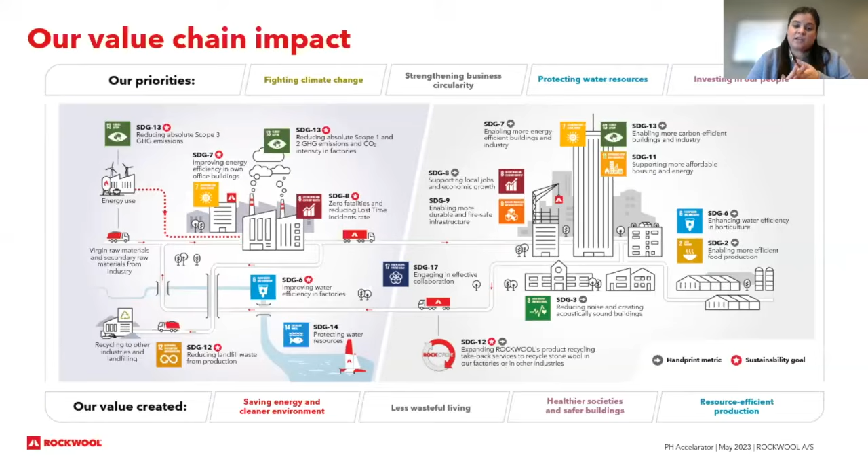I definitely wanted to highlight one of the sustainable development goals, which is SDG 17, partnerships for the goals. I think this is one of the really important ones — whether your company has official or unofficial alignment with these SDGs, it really focuses on the fact that we are all in this together. We all have a responsibility to work together to drive decarbonization down, to increase sustainability, et cetera. So this is one of our priorities as an organization, and one of the focus areas that Mahnaz and Robert play into is really trying to tie into the different organizations that align with our purpose and work together with the industry to drive the sustainability agenda as a whole.

But the title of this presentation was essentially ROCKWOOL Passive House, and how does that tie into the UN Sustainable Development Goals? So what I did was take a snapshot of what we highlight in our sustainability report, and what Passive House as the institution highlights in terms of the Sustainable Development Goals they've aligned with. What you can see here is that between both ROCKWOOL and Passive House, there are definitely some shared common goals that we are both actively working towards.

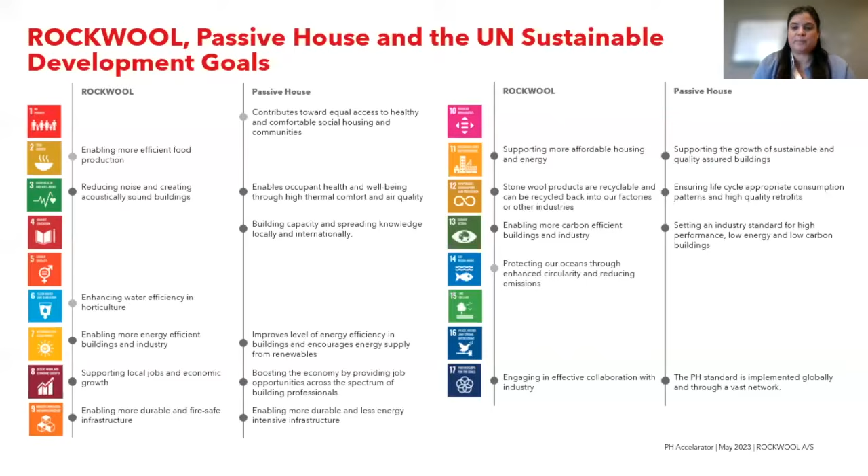So we did want to highlight some of the progress that we've had toward our sustainability goals. Again, you can find all of this information in our sustainability report that we put out every year. Back in 2015, when we initially committed to having sustainability at the forefront of our business strategy, these are the six goals that we developed and that are verified year over year.

First and foremost, reducing our CO2 emission intensity. Our goal was to reduce it by 20% by 2030. It's 2022, and we are 17% of the way there, so definitely in line with that goal. In the next slide, I'll talk about why we're so advanced in that goal, which has to do with additional commitments we've made.

We also have a goal, on the lower left, to reduce our water use intensity. Again, that goal was to reduce it by 20% by 2030, and by 2022 we were about 14% of the way there.

In the middle, you'll see increasing the areas or countries that have reclaimed material programs. Essentially, this leverages the recyclability and circularity that ROCKWOOL and stone wool insulation have by nature, being a product that is fully recyclable at end of life. End of life could mean scraps from construction sites, but it really ties into the conversation on retrofit—when buildings are retrofitted and have stone wool insulation, it can be taken out and recycled back into the process to develop new insulation. That's one of our goals.

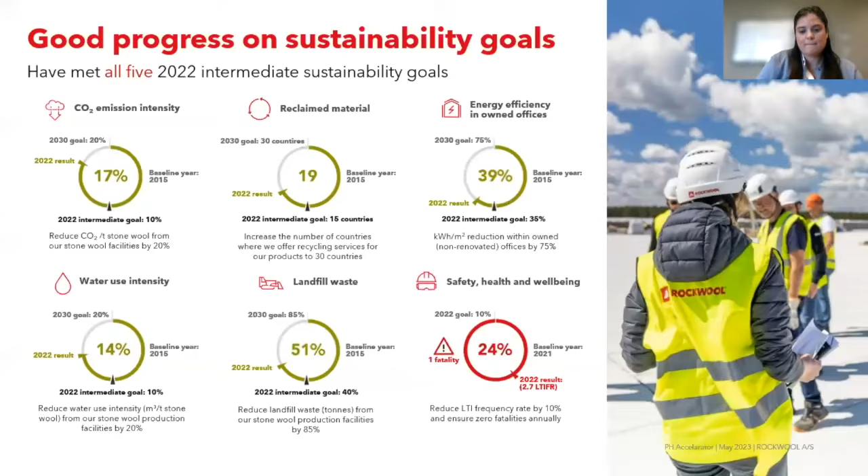On our next slide, I'll show you that most recently in 2019, we committed to even more stringent goals in accordance with the Science-Based Target Initiative. We committed to absolute greenhouse gas emission reductions of scope 1 and 2 of 38% by 2034, and we also committed to absolute scope 3 emissions reductions of 20% by 2034.

If you're not familiar with the differences between scope 1, 2, and 3: scope 1 is essentially the emissions associated with our manufacturing. Scope 2 would be the emissions associated with the energy production we use for manufacturing purposes. And scope 3 is basically everything else, upstream and downstream, that enables us to function as a company and as a manufacturer.

Because these are absolute emissions, and recalling from the previous slide that we're ahead of our original goal, having these additional absolute goals for overall greenhouse gas emission reductions has really deepened our focus on how we're going to decarbonize our facilities. Globally as a company, over the last few years we've made a lot of improvements to existing facilities, as well as having specific goals and frameworks for how efficient any new facilities will be. This is all part of the goal to reach that 38% reduction by 2034.

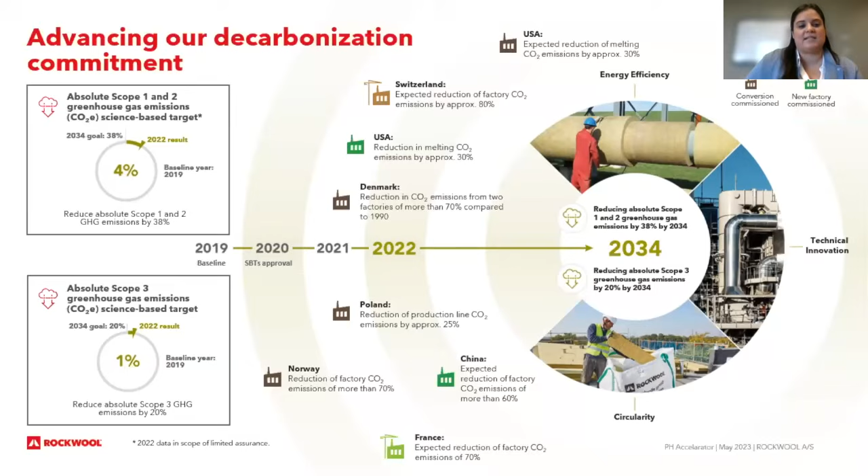The beauty of SBTI goals, and companies committed to them, is that in order to be approved to say you have these goals, you have to showcase how you're going to get there. It has to be fact-based, backed by science—demonstrating your strategy and framework, with science backing that yes, by doing that you can potentially achieve these reduction goals. You can't just go out and say as a company, 'I'm going to reduce it by 100%' if there's no real way of getting there. So it's another step toward having things third-party verified and validated for the market.

The big picture—why any of this matters—is because globally we have to reduce carbon emissions. We're focused on buildings, and as we've all seen, up to 40% of carbon emissions globally come from buildings. So that's ultimately what all of our goals are about, and we're all in this together.

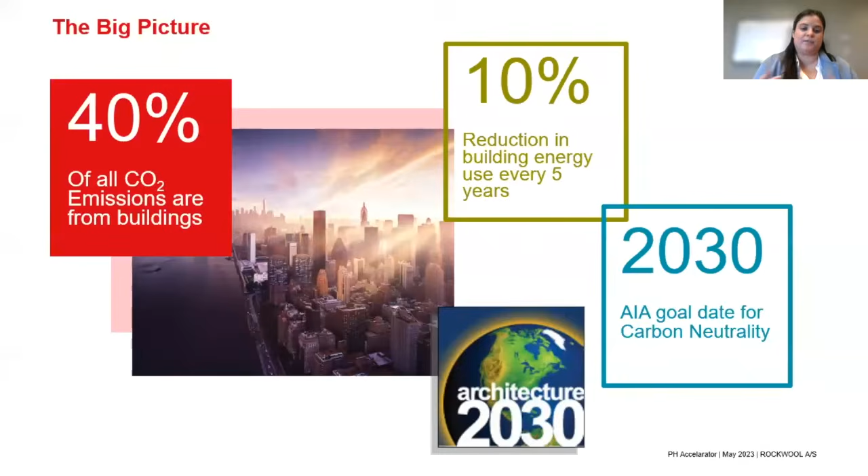Which comes to the second part of our conversation: focusing on retrofit, because we know buildings have such a huge impact on carbon emissions. It's important to focus on new construction and get those to net zero or near net zero, or passive house standard. But retrofitting buildings is going to be key to achieving these goals. I've highlighted some UN goals that I think directly contribute to and are directly applicable to retrofitting buildings.

Climate action, reducing environmental impacts, improving responsible consumption and production—retrofitting to passive house standard will enable these buildings to be more efficient, creating more sustainable cities and communities, and improving the health and well-being of building occupants.

Those of us who work on passive house projects know the additional benefits: comfort benefits from the thermal aspect, acoustical benefits, air quality benefits, etc. And then of course, highlighting partnerships for the goal—we're all in this together: manufacturers, organizations like Passive House, architects, designers, engineers. So with that, we can get into the retrofit side and the solutions we have to offer.

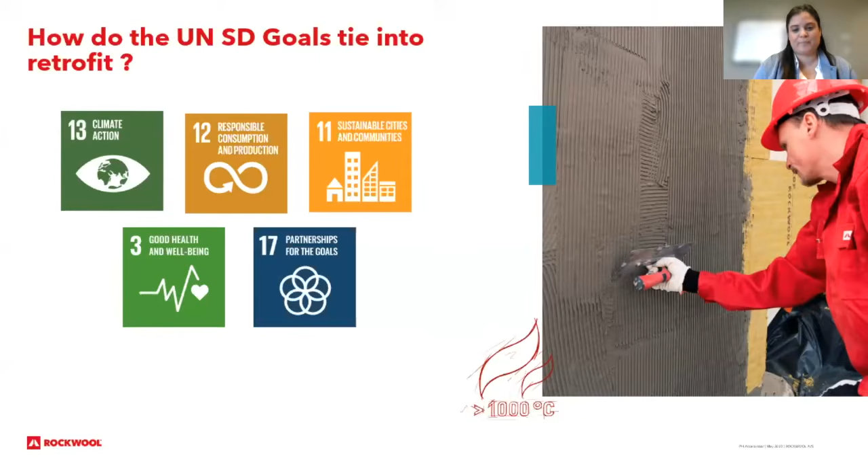One of the solutions we're going to highlight is the EIFS retrofit solution, which is certainly one of the lower cost solutions for getting into retrofits. Many people may not know this, but you can actually use stone wool as a non-combustible exterior insulation alternative to rigid foams. So when we're looking at a stone wool or EIFS solution, we again have to look at our assembly layers, because we're taking an existing structure and need to ensure we get an airtight and continuous insulation envelope.

First, we have to focus on having a primary air control layer, which can be different sorts of membranes, whether applied in liquid format or already existing. Then we need to add our thermal control layer. And finally, in the EIFS system, we finish with a finish render and reinforcing mesh to provide a proper surface cladding.

Definitely what's important here in this solution is that you have proper drainage efficiency. So the stone wool solutions and the types of materials that we can fabricate allow us to create different types of geometrically defined drainage channels behind the insulation boards. There are different manufacturers that have different patterns.

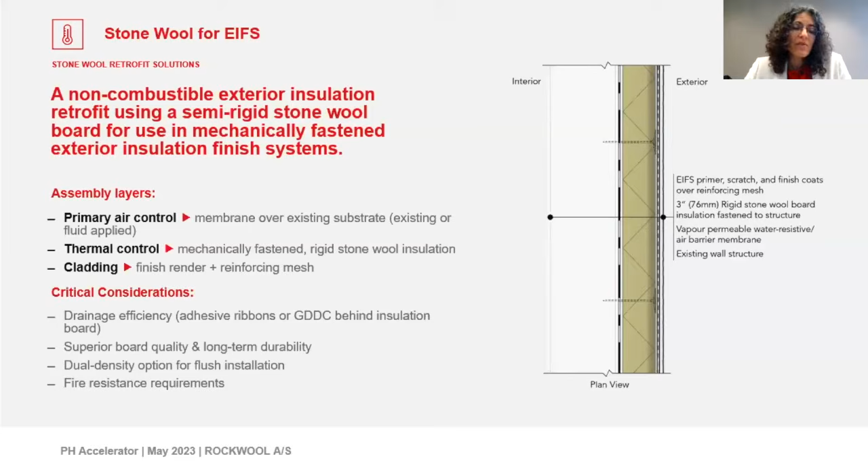We need to provide a really good board that allows for this handling, and is also a durable product. Using a dual density product would be helpful to adjust uneven surfaces in order to create a flush installation, and then by applying a fire resistant solution, you can get around issues such as buildings where you don't have any sprinkler systems installed. An example of that, and I had to add this photo here, is the Ken Soble Tower. I managed to get this because the Passive House Conference Canada took place in Hamilton, Ontario, from Monday to Wednesday, where we were present, and I was able to go there and take a photo of this great project.

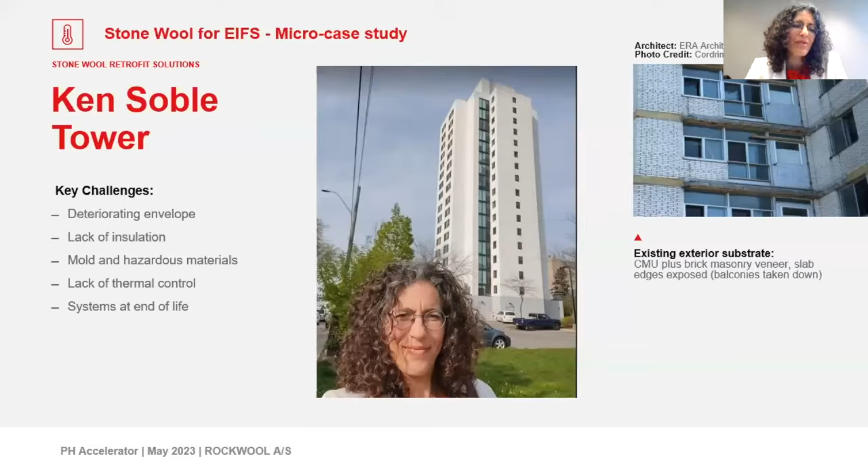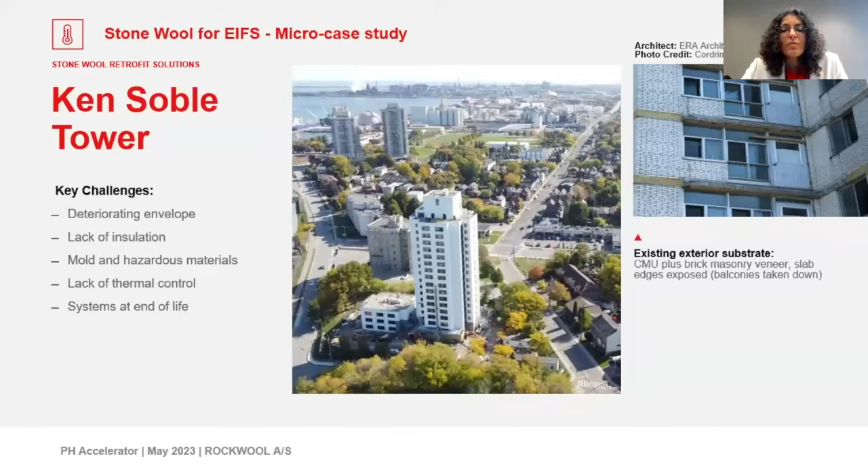So this is the Ken Soble Tower. It's really an interesting project. The architect was ERA Architects, and the key challenge here was a deteriorating facade. There was some mold, really a lack of thermal control, and most of the mechanical systems were at their end of life. So in order to provide a better envelope, a retrofit solution was chosen to get a really nice, low energy envelope in order to reduce the greenhouse gas emissions, and then EnerPhit certification was also an objective in this project.

And to date, it is the biggest EnerPhit certified project worldwide.

Another important factor was, of course, the reduction of thermal bridging, and passive climate resilience also was important, because we were looking at the specific group of occupants in this low income housing building. It's low income, or senior housing, and so the passive survivability became really important.

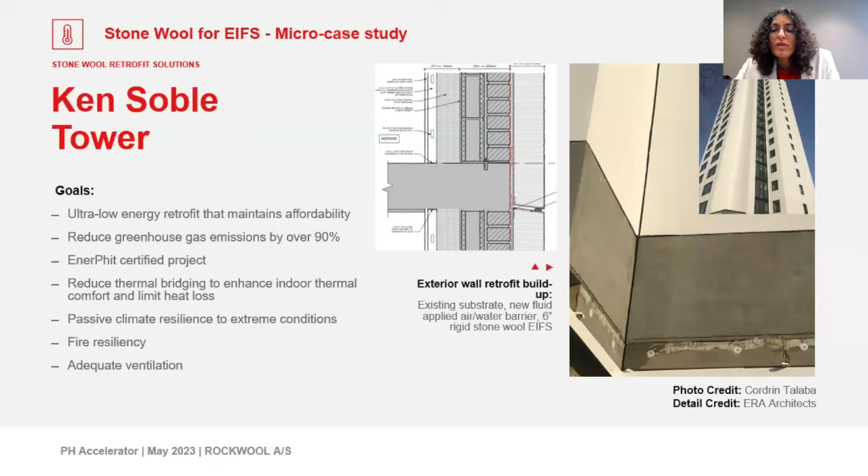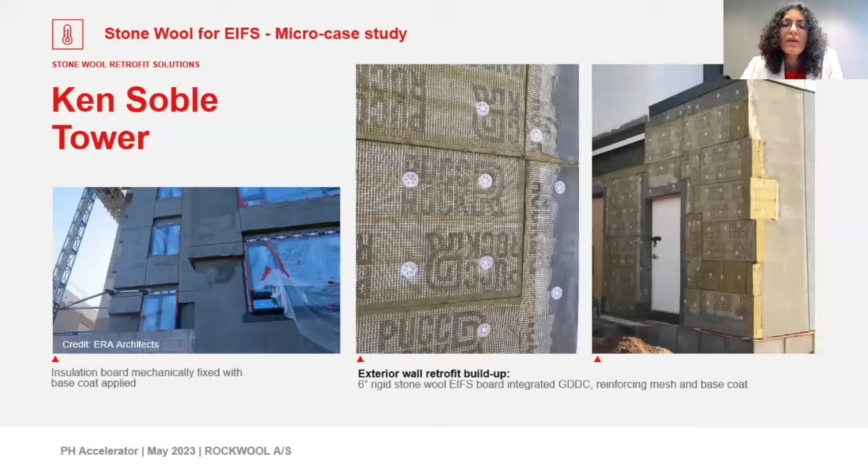So here are some images of the insulation board mechanically fixed, and then a base coat is applied. Here they were using 6 inches of semi-rigid stone wool. On the back side, this is the puck system, with rounded pucks on the back and drainage channels behind.

What was really interesting with regards to the survivability or passive resiliency of the project was some analysis that was done to evaluate the performance of the old and the new envelope over time.

So what we can see here is the interior temperature of the building at regular temperatures, and on the bottom part, we see the exterior temperatures. I think it actually happened that there was a power outage, and you could see that in a relatively short time, within hours, the interior temperature drops so rapidly at temperatures of -20, because the envelope is so badly performing. So people were basically forced to leave the building rather quickly.

An analysis was done to evaluate what would happen with this new envelope that is properly insulated and airtight. We can see here that it will take almost 2 days before people experience a temperature of 15 degrees, which is considered the survivability threshold for winter conditions.

A similar analysis was also done for overheating, and with regards to overheating, the new envelope will actually maintain the temperature at a supportable level for up to 4 days. So let me just get my mouse back here. There we are.

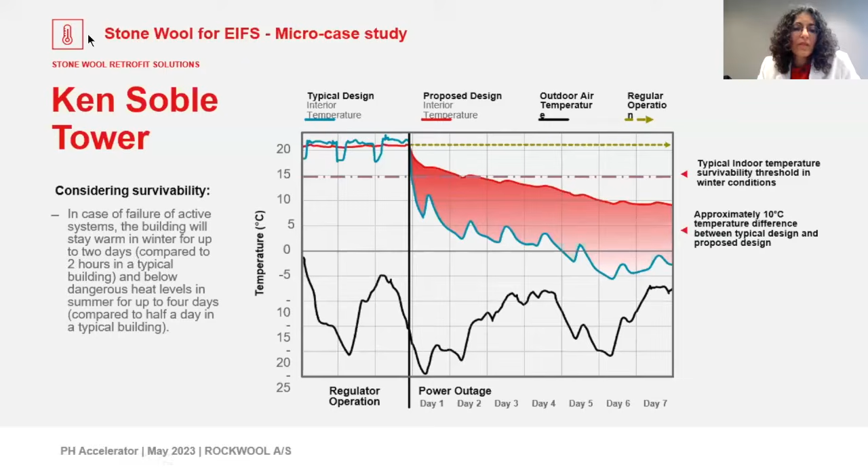Insulation boards are engineered to help reduce the amount of base coat that you need in this stone wool EIFS solution, and it will help create a more rigid surface so that it is more resistant to impact. At the same time, having a certain softness in the product allows you to adapt to irregularities of the wall. So this is a non-combustible insulation solution that you can use as an alternative to the standard EIFS systems that we know.

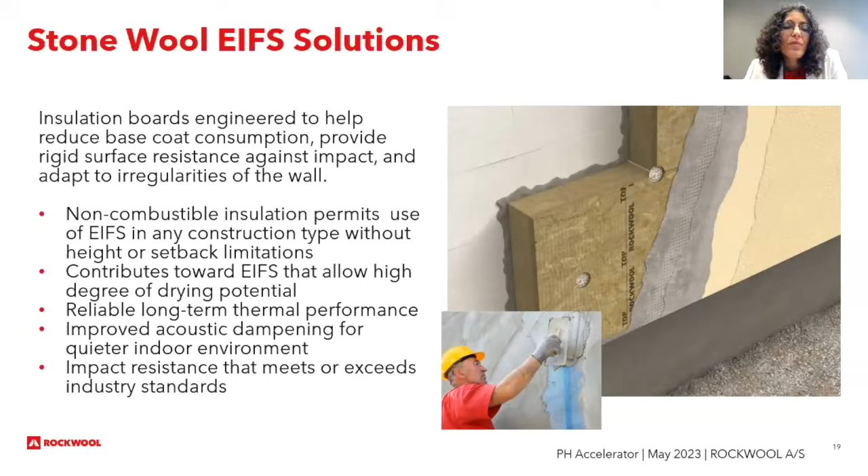So I'm going to talk about a different type of retrofit, overcladding, rather than using our EIFS solution, overcladding with a clip and rail and semi-rigid board solution. So you go ahead and slide. As Mahnaz mentioned, control functions are really key here.

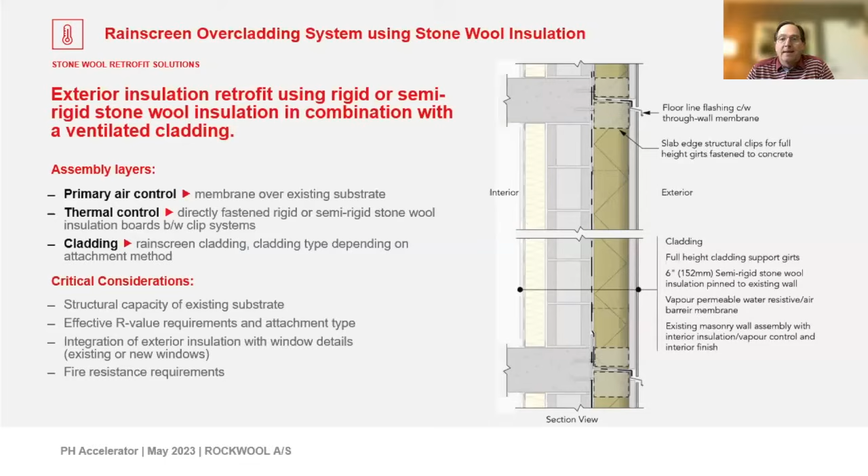But you also might see the use of a clip and rail system to minimize thermal bridging, and then of course supported, that's your cladding. Some key things to think about here: structure is important. The substrate that we're attaching to certainly needs to have some analysis and be able to support the weight of a new cladding. In the case of the project we're going to look at, brick was there before, so that shouldn't be a problem. But given the age of the retrofit you're looking at, these are variables we want to take a pretty close look at.

The other factors that they're dealing with on the project are the need to comply with Local Law 11. I'm sure there's a good number of folks on the call in New York City - this is where I really cut my teeth on building envelope. It's a facade inspection and safety program that's performed every 5 years, with a requirement to follow up on the findings of the engineer. In the case of this building and many like it in New York, that means that your building probably has sidewalk bridging around it for years on end. So that gets expensive, and so does the cycle of continuing to maintain these facades.

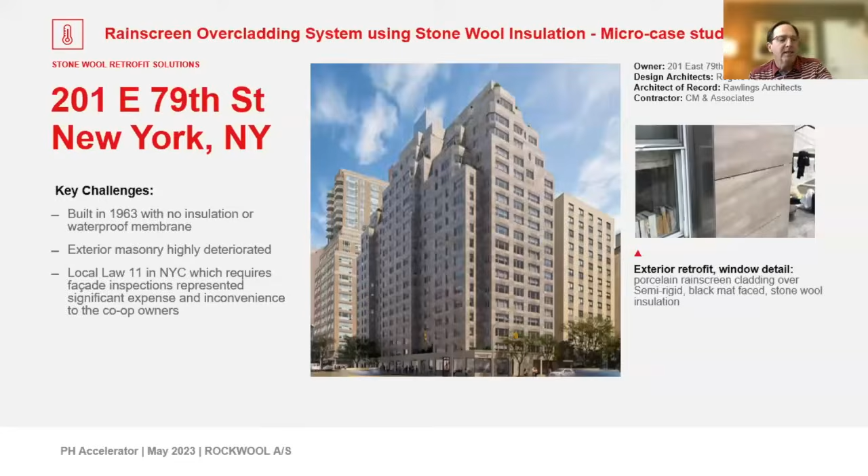So first step, of course, was doing some investigative work, looking at what that substrate looked like. Ultimately, the decision was made to remove all the brick and put in a new cladding system.

Some of the other goals they were looking at were to meet Plan NYC 2030, so carbon reduction goals of up to 30%. In the meantime, we also have seen the implementation of Local Law 97 in New York, so they happen to get ahead of that as well. They're looking to avoid the compliance fines around Local Law 97, as well as Local Law 11. Of course, we want to improve indoor comfort with the effort.

This is a co-op building in New York, a lot of structures like this in this part of the city, with some of the original occupants still there from 1963. Of course they want to increase their property value, and the big goal here, of course, is to come up with a better energy efficiency picture overall.

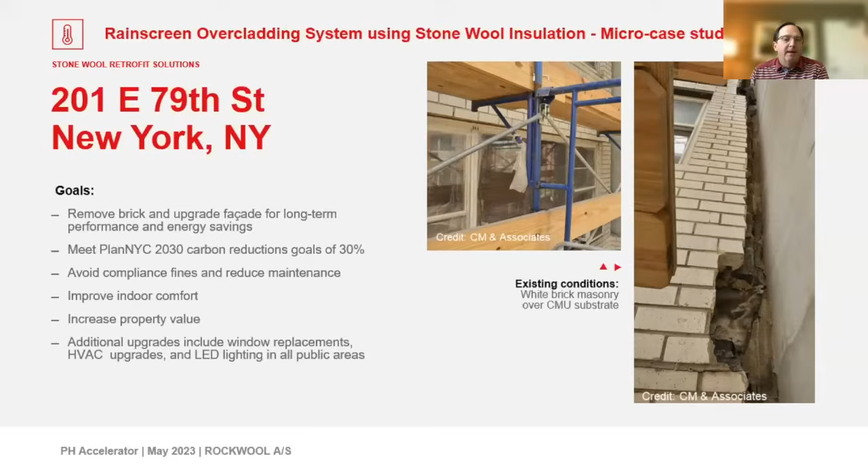The brick was completely stripped. The CMU was parged and patched in a lot of areas, as there's definitely some vulnerabilities in terms of structure. A liquid applied WRB was implemented, and then they utilized a clip and rail system, looking to minimize thermal bridging in attaching this new open joint porcelain rain screen. The insulation that they used was our Cavity Rock Black - that's our Cavity Rock material, dual density material with a black facer. That integrated black facer, of course, so that not everybody appreciates the beautiful greenish brown hue of our material. So really just a visual block, so that sight lines through the open joint rain screen are basically blacked out.

We'll concentrate less on the window portion of this - as you can see on the right there, that's a brand new window that went in with the cladding system. We're really looking at the opaque part of the wall here. But then they used a stainless closure for flashing there for greater efficiency, stainless steel being much less conductive than carbon steel, and we'll look at why that's important as we go through.

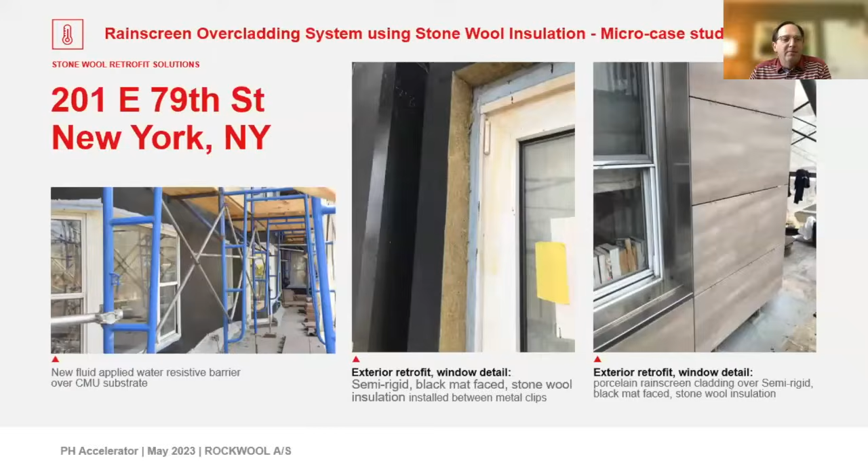One thing I think that's important to look at as we look at overclads and cladding attachment in general is that we can add a bunch of insulation to the outside of our new build, but if we don't minimize thermal bridging, then we can lose a lot of our efficiency through that thermal loss.

So we look at a couple different scenarios here. Oh, hang on a second, I think we're lagging. Can you click? There we go, it doubled.

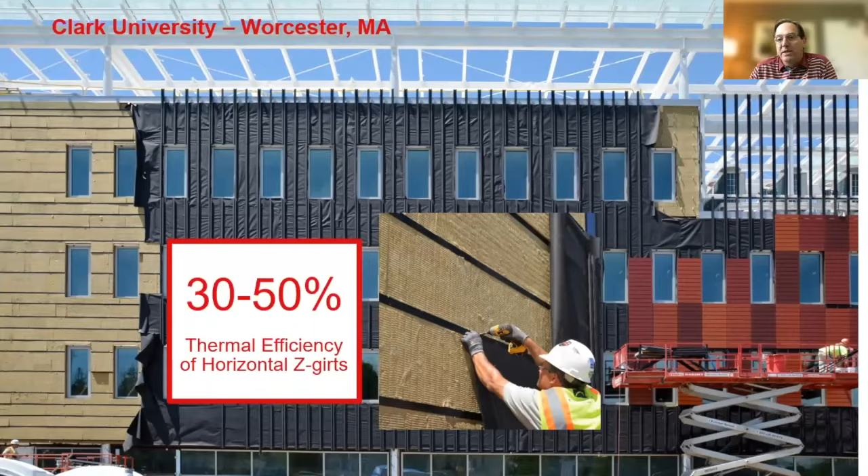Same idea here, we have a basic clip and rail system, but with no thermal break. These particular systems use very robust clips, plate steel, not pressed metal, spreading those clips out by 3, 4, maybe 5 feet, getting up to 75% efficiency, but certainly somewhat difficult to use in terms of adjustability. And what we really want to look at is the next scenario.

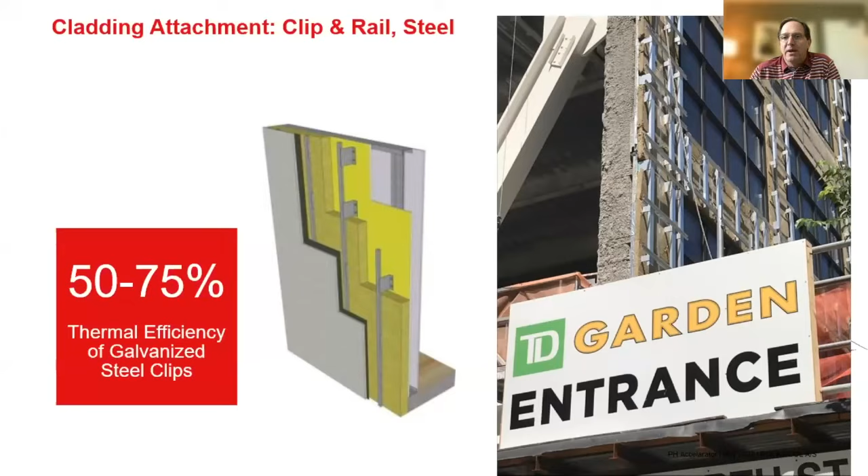Using some sort of thermally optimized clip. In this case, it's a pultruded clip with that double cell structure in the middle of the clip, and then 2 fasteners that go through it. But these are the levels of efficiency we see.

The range in those numbers really comes from what's the weight of the cladding. The higher the cladding weight, of course, the more clips we have to use, the less thermally efficient we are. Also, the type of fastener that's used with this clip has a bearing. As I mentioned, stainless is less conductive than carbon steel, so if we use carbon steel fasteners instead of stainless fasteners, we see a diminished thermal efficiency. All of these fasteners add up, especially with a big facade. We're talking about thousands of small thermal bridges.

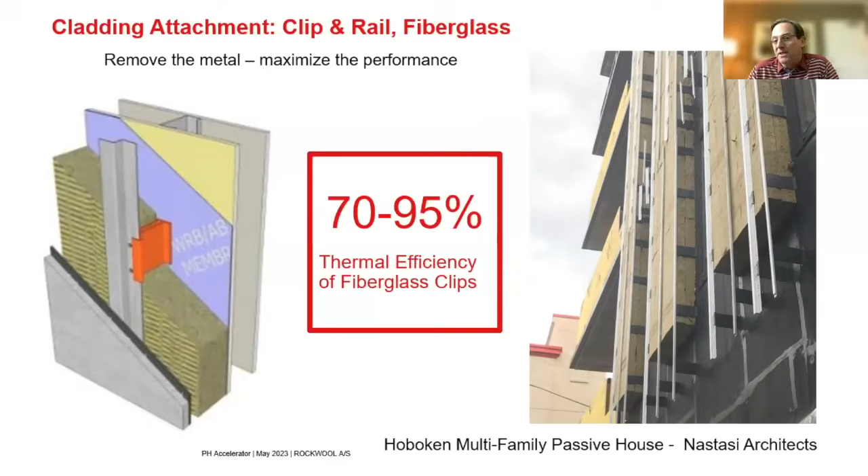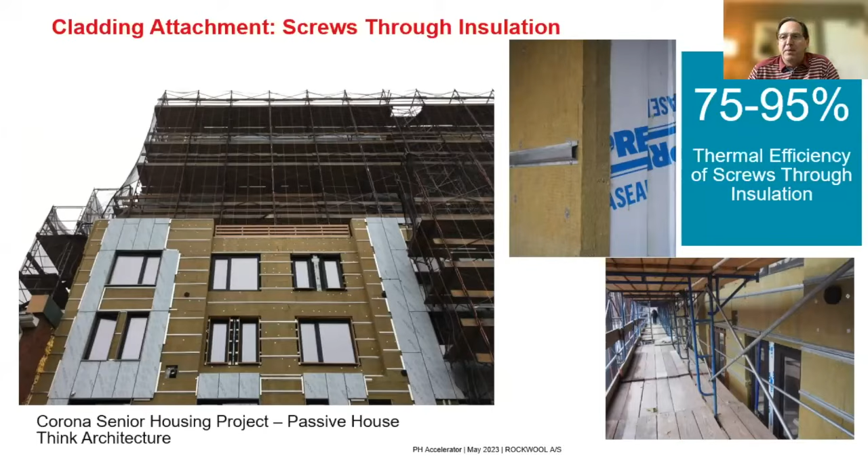So the other option is to use a rigid board and screws that pass directly through it with an over applied girt, and we see similar numbers in terms of efficiency. In some cases, we see less cost because we've eliminated a layer of hardware. Again, that range in terms of efficiency comes from how many fasteners we're using, depending on the cladding weight, and what type of fastener, stainless versus carbon steel.

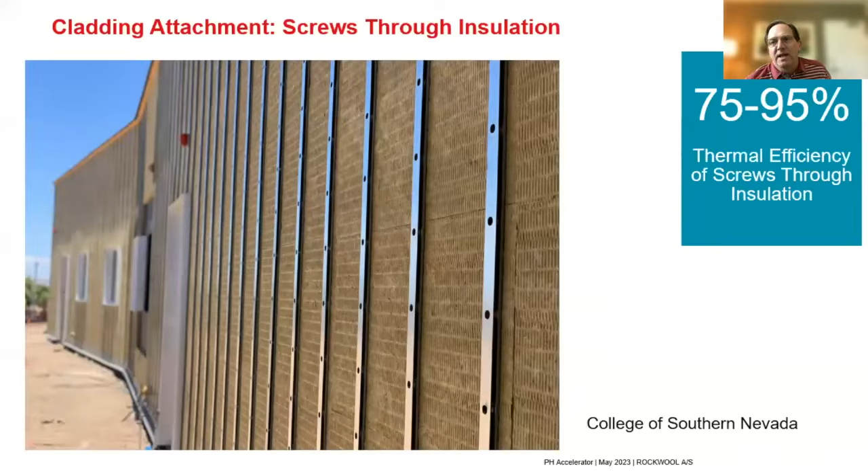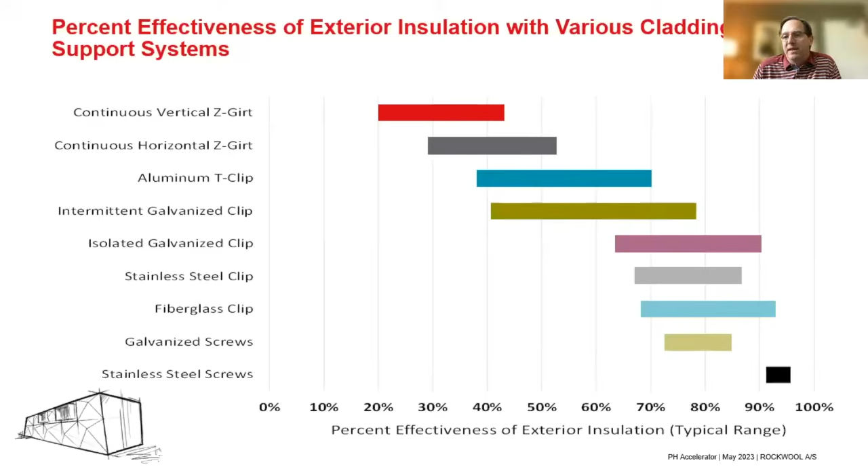These couple of projects here all utilize either horizontally or vertically applied girt to attach our structure to. Just a real quick metric on everything from continuous vertical Zs, clearly the least efficient approach, all the way up to stainless steel screws, one of the most efficient approaches, and the range in terms of thermal efficiency that we see out of each of those.

The material that was used in this instance was our Cavityrock Black, a dual density product. You can see in that image, if you look closely, that the material closest to the facer is of a different consistency, a higher density, so the boards can be butted together and have a tight fit to each other, and then the back of it a bit softer to accommodate or form around the hardware that is being used with it, to form around the clips, and also to kind of suck up the irregularities in the wall on the substrate.

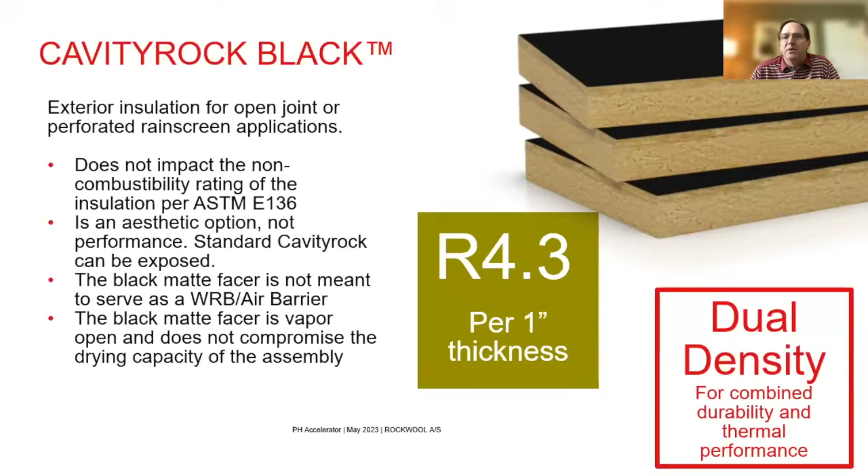Then we'll look at also an interior retrofit solution. When we look at doing retrofits, of course, we don't always have the luxury of cladding on the outside. We might be limited by our lot lines and setbacks, or by historic preservation efforts. So then we, of course, look at having to do that retrofit from the inside. All of the same kind of properties apply.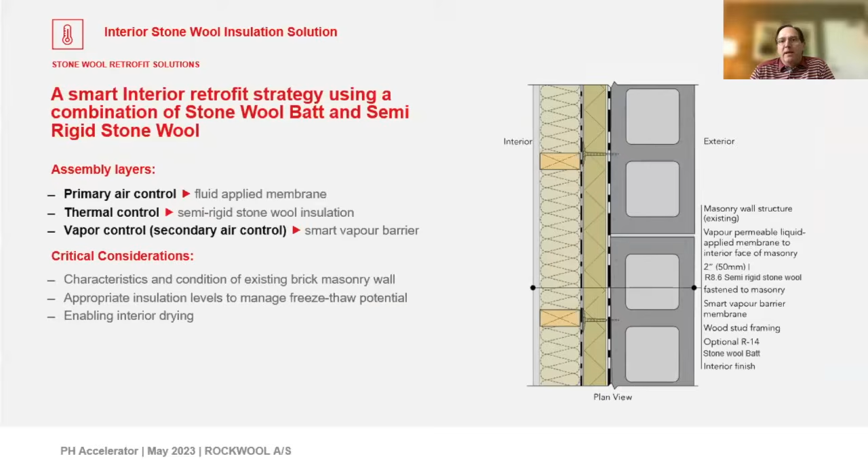We need to look at a primary air control, again, over existing masonry. That is typically a fluid applied material. Look at applying our thermal barrier. In this case, we're talking about a project in Brooklyn.

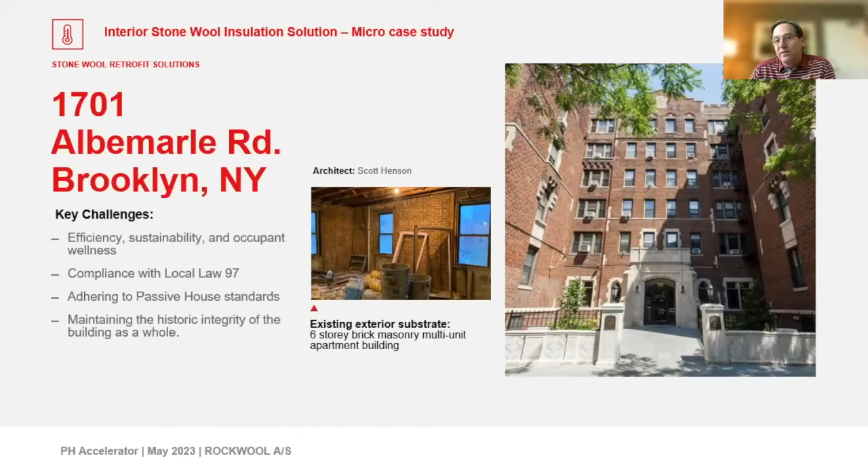1701 Albemarle Road. The goals here, of course, were efficiency first, sustainability, occupant comfort, and wellness is going to come along with that. This building is also a co-op, an older Finnish co-op, pre-war. So what you would expect out of this Finnish building, 3 wythes of historic masonry. They're looking to, as a co-op organization, also satisfy local law 97, so those punitive measures begin to kick in here.

Those punitive numbers begin to kick in here as New York starts to move towards net zero for all buildings, really kind of the same metrics as Local Law 97, buildings above 6 stories and generally over 25,000 square feet.

They wanted to improve thermal comfort with the building. They also wanted to improve acoustic performance. Clearly, as New York gets busier and busier, hearing neighbors outside and hearing neighbors above and below was a component.

So we can see on the left here the pre-retrofit photo, existing conditions. Again, 3 wythes of historic masonry, no air barrier, single pane windows, and then we can see on the right the beginnings of the post-retrofit buildup.

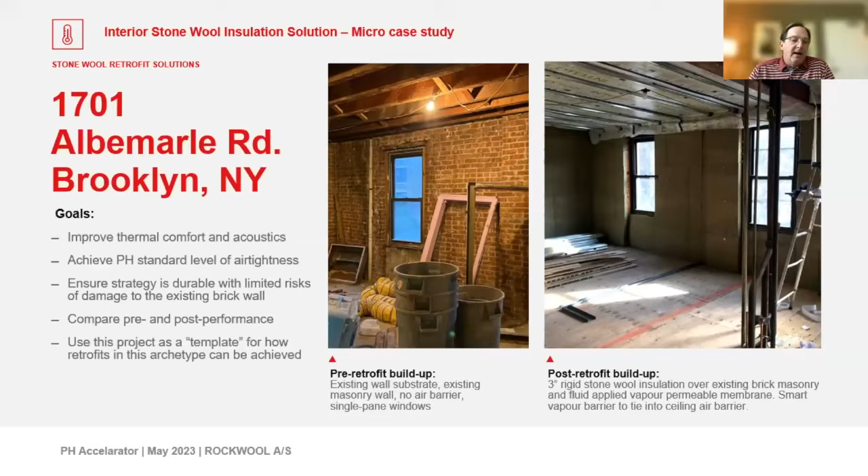This included that liquid applied air barrier, a vapor permeable air and water control layer over the inside of 3 inches of semi-rigid stone wool. So really kind of doing this reverse engineering of a rain screen from the inside, and then additional thermal materials on top of that, which we'll see in the next slide.

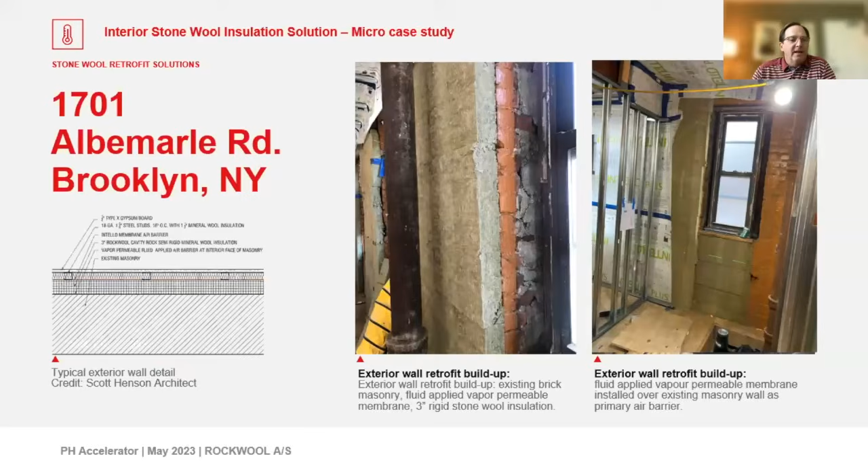We can see that smart barrier that was applied between them. So what the real key thing here was what's happening with moisture in all of this historic brick.

A lot of thermal modeling was done on our part, and also along with the architect and the key passive house person, who was Jane Sanders with Scott Henson Architect. But really what we want to look at is keeping that moisture threshold, especially in the heating season, down below a certain mark.

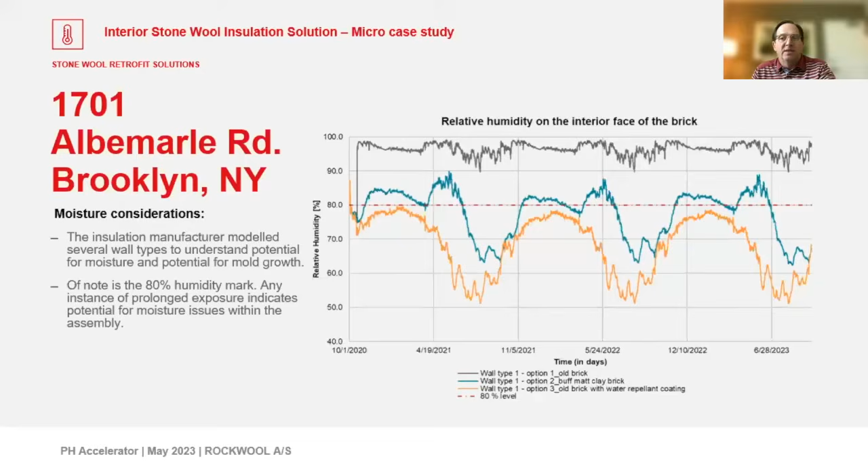In some cases, and I see this quite a bit in New England where I'm at, where we're doing a lot of historic restoration, even testing the brick to make sure that it's going to stand up to the potential for stranding of moisture in that brick during the season where all that warm moist air is going to be pushed out through the masonry.

So the products that were used here were cavity rock or unfaced cavity rock. Typically this would be used outside, but this was a bit of an atypical application. So the key here is vapor permeability, allowing that wall to dry to the inside through the vapor permeable insulation.

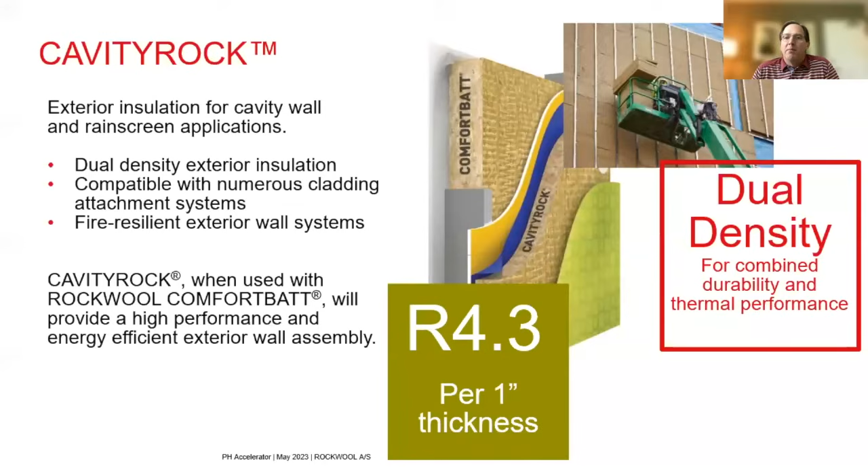Through that smart barrier, that Intello barrier that is the variable vapor permeance material, it's keeping diffusion from pushing moisture out into the wall, but also allowing the drying to the inside.

We also used comfort batt in the service cavity in the studs. That 2-stage approach that was taken on the project was done because they wanted to maintain the integrity of the smart barrier inside of the cavity rock, and then have additional thermal insulation to hit those efficiency numbers.

These are spaces that are going to be occupied by different folks over time, and they wanted to be able to not have that air barrier corrupted.

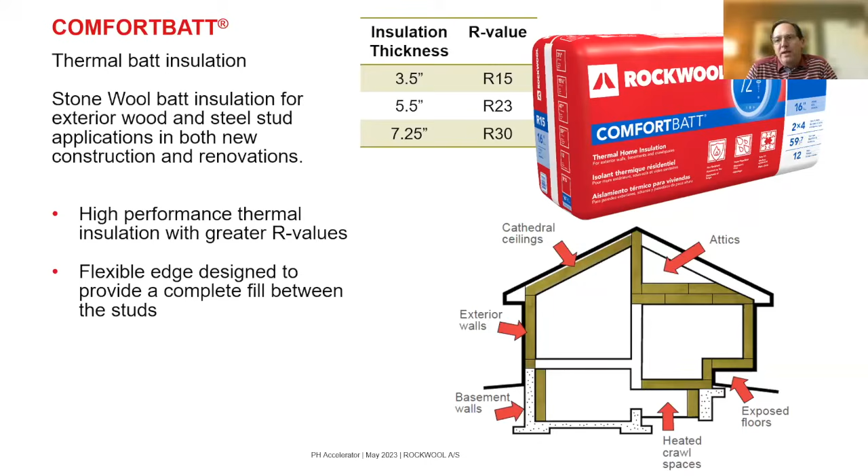And then between floors, they utilized acoustic fire batt to deaden the sound. I don't know if you've noticed in the images, but there is also, it looked like, a resilient channel used between floors to minimize the acoustic transmission between floors.

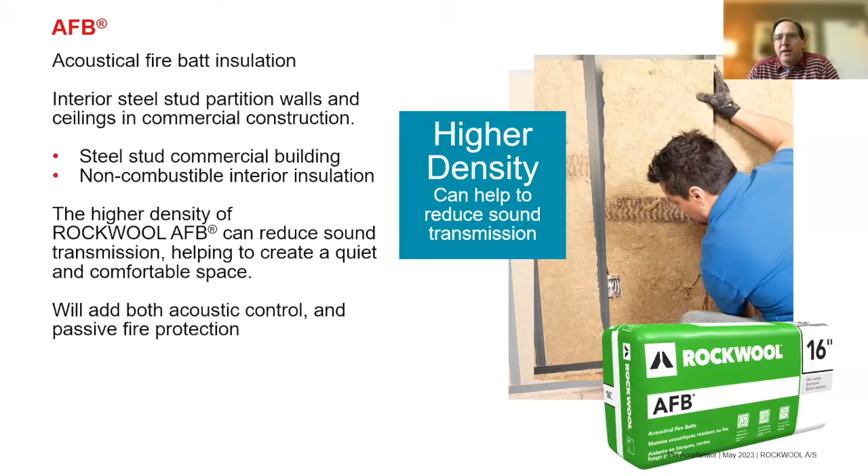So with a combination of those materials, we get a good solution for mitigating sound from floor to floor. So some additional considerations.

I think that Alejandra is going to pick back up here and talk a little bit more about carbon embodiment and EPDs. As Rob was alluding to, just as we start retrofitting more buildings, as we build a passive house, of course we're increasing the efficiency of our buildings. But when we build more high performance buildings, what happens is the operational carbon emissions reduce and the embodied carbon starts increasing. So it starts becoming a bigger piece of that pie, per se.

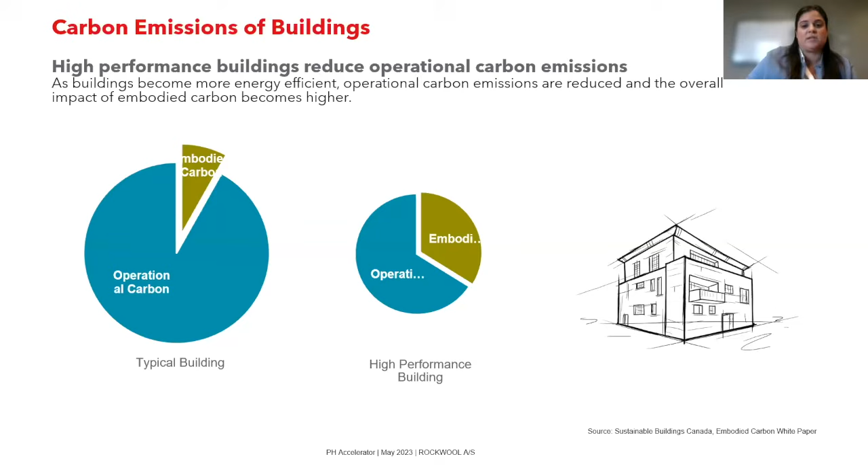We always have to consider the embodied carbon of the products we're choosing for our building envelopes. From the lens of installation, I'm not going to go into depth on how we compare products from one another. Right now, what I'm showing is just a snapshot of some exterior insulations available in the market—by no means all of them—and not necessarily honing in too hard on the numbers themselves, but really understanding the considerations we have to be aware of if we're going to make product choices by looking at environmental product declarations that different manufacturers are putting out.

When we look at global warming potential values, it's a single number, so you want to take a big picture view and understand how these EPDs are being developed, to make sure that if you're comparing numbers, you're comparing apples to apples—in terms of the methodology followed to create that EPD, the assumptions, the data sets, the product category rules being used. As many of you who've done energy modeling know, your output is only as good as your input. If you're putting in different inputs from different sources, that can change the output and make it not comparable.

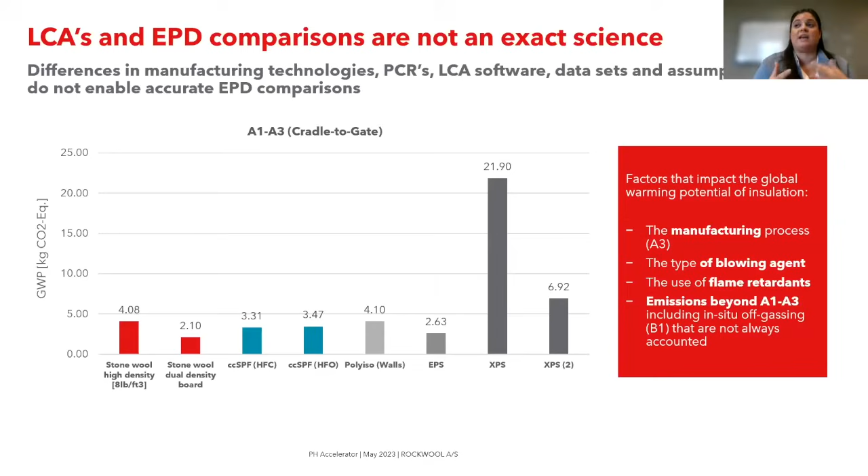Again, this is just a snapshot of some of the exterior insulations available out there. You're going to see a difference in performance, and that difference is based on the type of product: what are the raw materials, what is the manufacturing process, are they using additional ingredients with high carbon intensities, such as blowing agents. And of course, you always want to consider things beyond just that initial product stage—it's critical for a life cycle assessment to assess the full life cycle of a product.

Honing in on stone wool and rock wool specifically, we've done in situ studies to look at the impact in terms of reduction of carbon emissions from insulation that has been produced and sold into the market. This is a third-party verified document available on our website, and you can see it's anywhere between 100 and 150 times the operational carbon savings compared to the embodied carbon emissions emitted for the production of that product. That speaks volumes to how important insulation is to reach our climate goals.

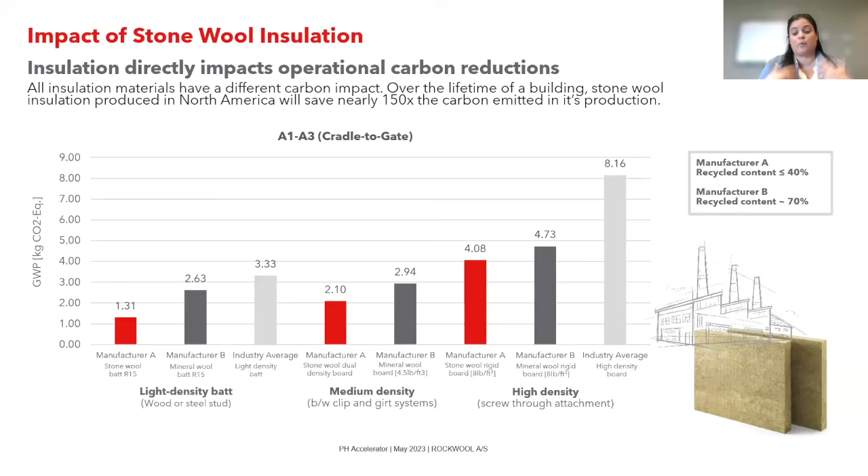Of course, EPDs are great, and looking at global warming potential is great, but there's so much beyond that. Some of the other environmental factors included in an EPD include ozone depletion, but also looking at products more holistically—are these products contributing to what we consider the circular economy? Are they circular by nature? What about health and safety? Fire—Rob's going to touch on that a little bit in the coming slides as well.

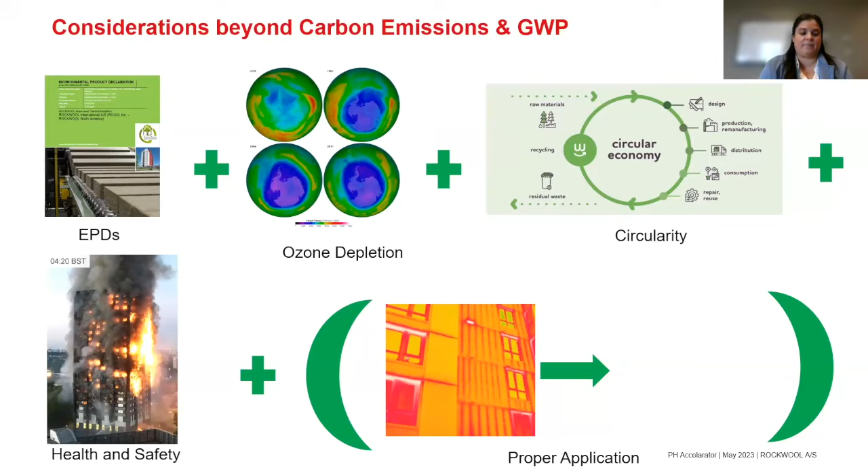Thank you, Alejandra. So I think, if we look at the slide, what we're generally talking about here is change in climate and the increase in frequency and severity of wildfires. This isn't just California anymore. Very specifically, when we look at the Marshall fires in Colorado, these events are becoming more and more commonplace.

We are actually participating on a panel coming up for the Passive House Network Conference in Denver to speak very specifically about the benefits of passive house when it comes to passive survivability, not only for occupants, but also of the structure, the benefits of airtightness and non-combustible insulations in these areas.

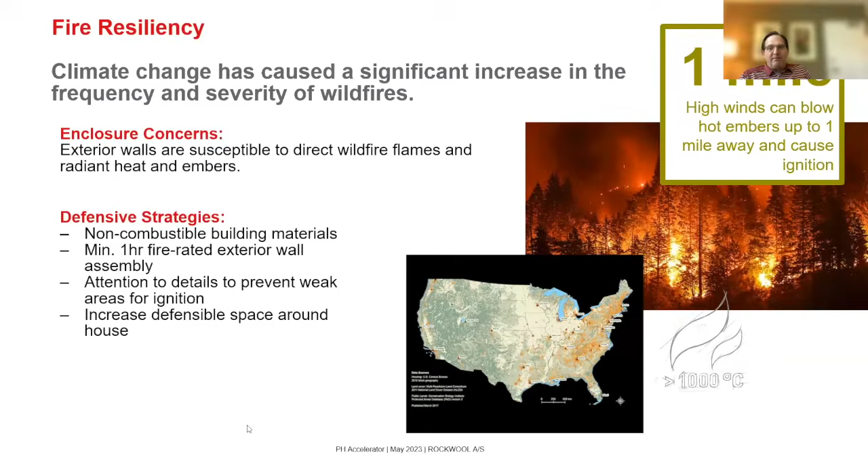Even where I live north of Boston, in Cape Ann, we saw repetitive wildfires in an area where I would never have imagined that to be something that we would be talking about, but here we are. Very specifically, if you go to the next slide, please.

Very specifically, if we look at some considerations around specific to our thermal barriers, like Alejandra was saying, in terms of making like-to-like comparisons, there's some factors around each of these materials that we need to look at.

R value is not a constant for most everything. In some cases, it's not as published. Some materials change their R value over time. All materials are temperature dependent, so that can be due to the physical properties of the material. It could also be the chemical properties of the material. It could also be dependent on what the material does when it gets hot and cold, right?

We know that thermoset and resin set plastics expand and contract quite a bit as temperatures change, and then also some thoughts around vapor permeability and acoustic performance. Slide, please.

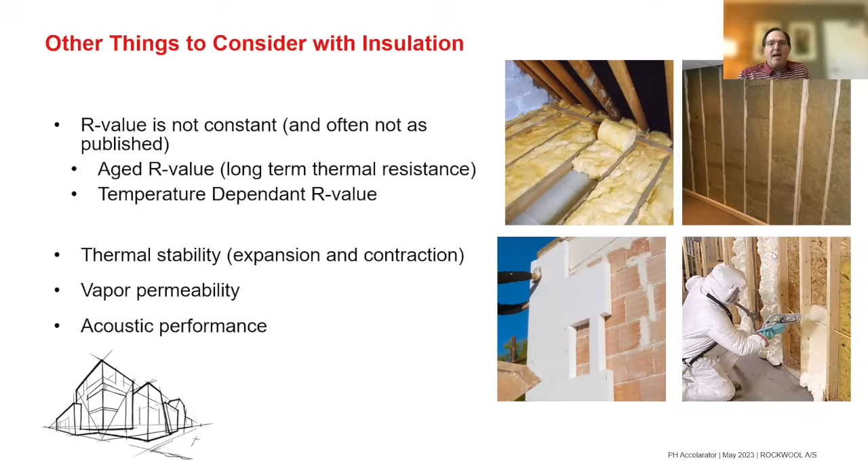Just real quickly around aged R value, stone wool and mineral wools, fibrous insulations get their R value from trapping air, and XPS and polyiso get their R values, or at least a piece of it, from a blowing agent. And over time, that blowing agent condenses or off-gases, and when that happens, we all kind of land in the same bucket for long-term performance.

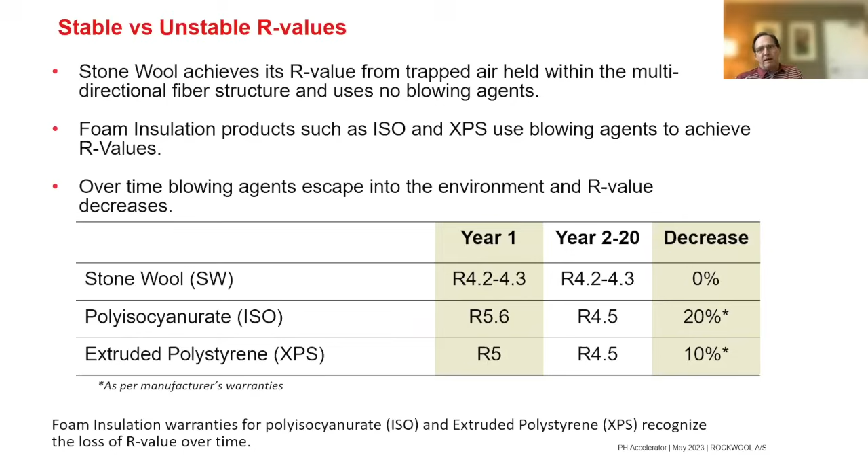So as we look at all of the different points of data while we compare these materials, it's important to have a realization that that's a component as well.

And so just to quickly summarize, we know that climate change is a reality, and when we look at how we're doing retrofits, things that we need to consider, right? So what's our embodied carbon versus our operational carbon, the materials that we select. We want to minimize the carbon attributed to the measures that we're taking. With climate change in mind, that added thermal resilience is an obvious key.

And then as we look at enhancing that envelope, we want to make sure that we're making it last for as long as possible. We're typically taking a ferroconcrete frame that's got a lot of carbon already associated with it. We want to make that effort go as far as possible, and then also look at, of course, occupant comfort, getting to be as big a concern, of course, as making the building more efficient.

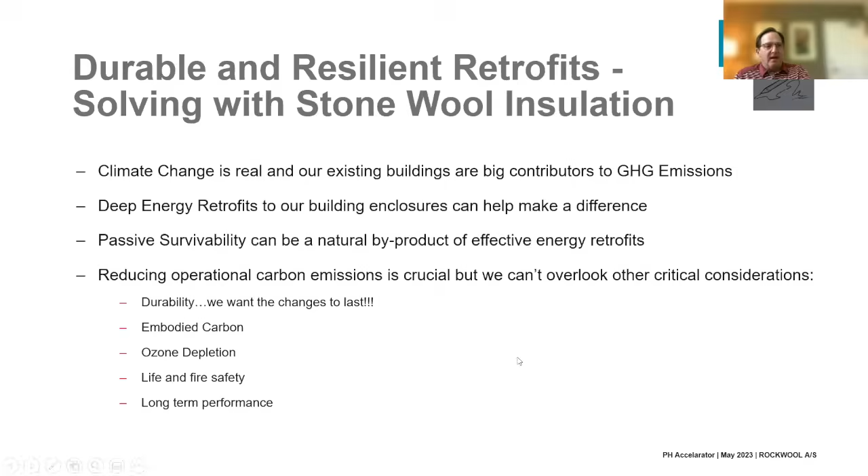And that's it. I see that we have a ton of questions in the chat, and I expect nothing less. I think the last presentation that we did had as much time for Q&A as it did for presentations, so I'm looking forward to that.